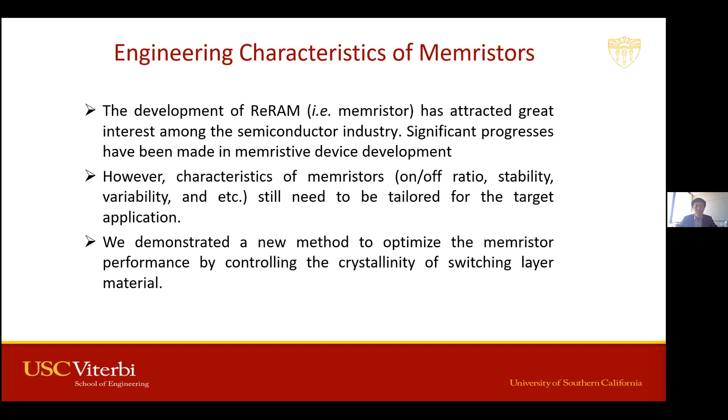And recently, we found another new way, a new knob we can turn to tune the characteristics of memristor. This is actually through controlling the crystallinity of the switching layer materials.

So this is the specific memristor structure we are using right now. We have a top electrode and bottom electrode, both made of platinum. And the switching stack consists of a tantalum and aluminum oxide layer. The aluminum oxide is deposited using atomic layer deposition.

And the fabrication process is actually fairly straightforward: just put one electrode, then put the switching stack, and put another electrode. And the one thing is, when we deposit this aluminum oxide layer using atomic layer deposition at different temperatures, the aluminum oxide layer will have a different crystallinity.

And here it shows XRD data of the aluminum oxide layer deposited at different temperatures. You can see when we deposit this aluminum oxide layer at 80 degrees C and 120 degrees C, it is amorphous, and when deposited at 160 degrees C and 200 degrees C, it is polycrystalline. And here we summarize the property.

One sample is deposited at 160 degrees C, and the average grain size is about 150 nanometers. Another one is deposited at 200 degrees C, and the grain size is about 207 nanometers.

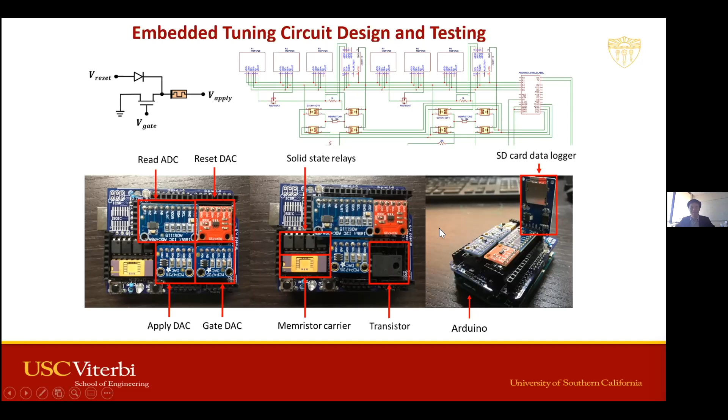But for the real application, we don't need this. So this is a circuit diagram, and this is the setup.

Okay, so now we have this nice device, and with it we can program different conduction states. Now let's go talk about the real fun part: the hardware implementation of the simplest cerebellum for the simplest robot.

In order to do this, we need two functionalities: one is sensor fusion, and the other is the control algorithm. For sensor fusion, we implemented an analog Kalman filter, and for control, we implemented a very simple PID control. Now let's look at those.

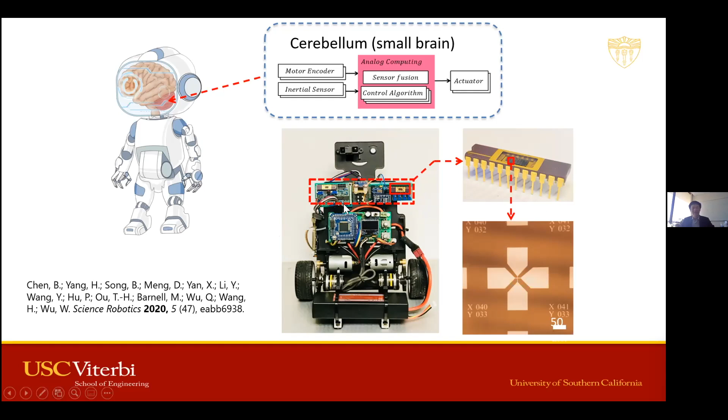Here is a picture of the car with everything installed. You can see two boards, and on each board we have a chip carrier with memristor chips. On the right-hand side is the sensor fusion part, and on the left-hand side is the control algorithm part. Now let's look at this in more detail -- this self-standing car is basically an inverted pendulum.

This is the system diagram. What we have is a memristor Kalman filter, used to synthesize the signal from a gyroscope and accelerometer.

After that, the result from the Kalman filter is fed into a PD controller. Basically, the Kalman filter tells you the state, or what angle the car is at now. Then it tells the PD controller, and the PD controller controls the rotation of the motor.

More precisely, it sends a signal to the motor controller, and the motor turns to keep balance. This part is all in the analog domain -- the Kalman filter and PD controller are analog, but the motor control module is digital. It's a digital motor, which is why we call it a hybrid computing platform.

Now let's look at this. Here, the sensor fusion we are implementing is a Kalman filter, which is probably one of the most widely used sensor fusion algorithms.

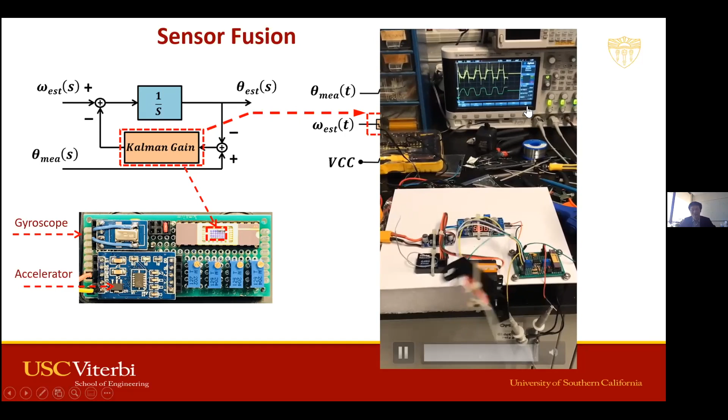Okay, in order to achieve this, we have to have a proper Kalman gain. Proper Kalman gain means you need to put in the proper conductance of your memristor. If you don't have the proper conductance, your Kalman filter can either undershoot or overshoot.

When we first showed this result, someone asked us: why do you have to have a memristor here? In this circuit, you could just replace the memristor with a resistor - calculate what your Kalman gain should be and put in a proper resistor. Why bother with a memristor? That's a very great question. It turns out the Kalman gain is determined by the noise level of your prediction and your measurement. The noise level of your device is actually different from each other, even for exactly the same model. For example, we bought four identical gyroscopes, exactly the same model.

When we put those 4 different gyroscopes in our system, you can see for gyroscope number 2, the Kalman gain is perfect. We're using the exact same Kalman gain and the exact same conductance value of our memristor in the circuit. But for the other 3 gyroscopes, obviously the Kalman gain is not optimal.

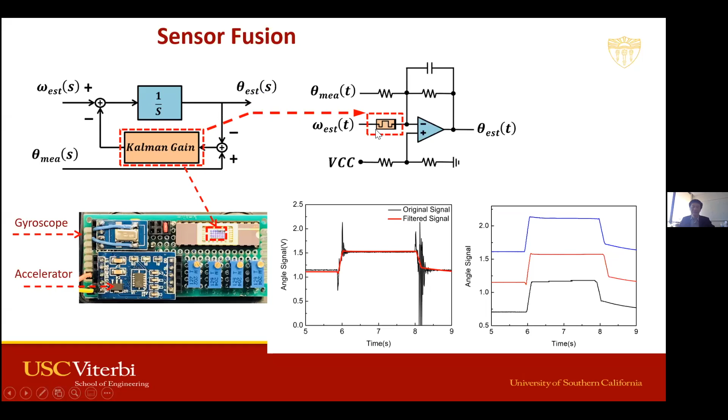Not only this, the noise level of the device also depends on temperature. For example, at 29 degrees C, our system has the perfect Kalman gain. But when it's too cold or too warm, we need to change the Kalman gain. Because of this, you want a device in your circuit with a conductance value that is tunable, making it much easier to implement this system.

And then now we have the sensor fusion part. Now let's talk about the control part. Again, we implemented the simplest possible control, a PD control, actually even a simplified PD control.

For the inverted pendulum, we have a damping in the control. You can think of it like a spring: the spring has damping. If the damping is too low, you pull your spring and release it, and it will vibrate for a long time. But if the damping is too high, you pull the spring, release it, and it takes a long time for the spring to slowly go back to the equilibrium state.

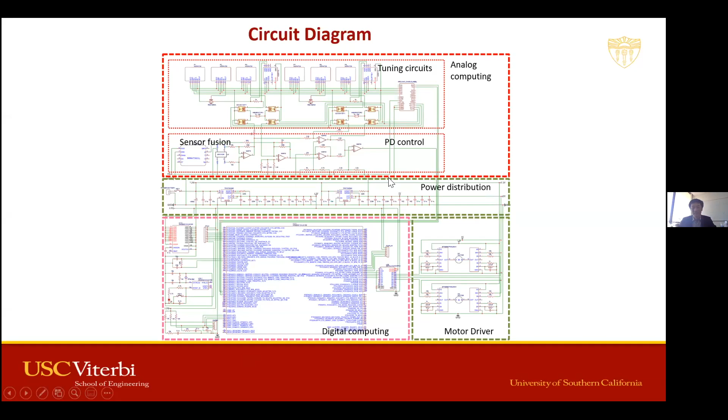Those two memristors can either be connected to the sensor fusion part or the PD control part. This is the circuit we use to tune the memristor conductance, a tuning circuit controlled by, essentially, analog parts, but here we have an Arduino to control it, and Arduino of course is digital. This is the part that actually comes with the self-standing car originally, including the power supply, the motor driver, and other controls of the car, for example the small display screen on the car, things like this. And yeah, those are the memristors.

We would also like to compare with some other previous work. To put a long story short, for this self-standing car, on the gyroscope, it actually comes with a digital Kalman filter. But this digital Kalman filter is relatively slow, taking about a few milliseconds. For this one, it costs almost 9.5 milliseconds, which is fairly slow.

Another way to implement this is using a faster processor on the car to do the digital Kalman filter. But the latency here, for the Kalman filter itself, the calculation is very simple, the math is very simple. The most latency actually is on

the communication bus. You have to send, of course, the device first gets an analog signal, then the ADC converts from analog to digital, then the data has to be sent from the communication bus to the processor, then the processor does some calculation, and then sends it to the PD control. So that gives about 3 millisecond latency.

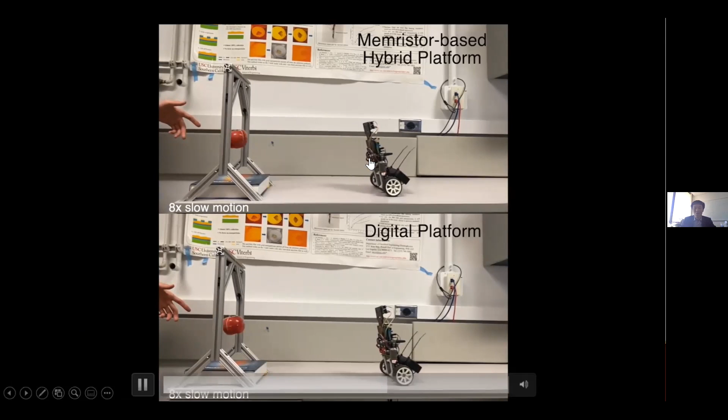Did you see the top one go back to balance much faster than the bottom one? The bottom one shakes for quite a while. Let's have a look again.

You see the bottom one shakes for a while. I want to look at the wheel this time. You can see, if you pay attention, for the top car, after impact of the apple, the wheel starts to spin immediately. For the bottom one, if you look carefully, there's a small delay before the wheel starts to spin.

That's why the bottom one shakes so much, and that's basically why the top one goes back to balance so fast. The latency is much smaller, and that's why it's much more stable.

So basically today I talked about two things. One is a way to engineer the characteristics of a memristor through controlled crystallinity of the switching material. The second part, I showed you the simplest cerebellum for the simplest robot, implemented using memristor-based analog computing plus some digital part, and it shows much nicer performance.

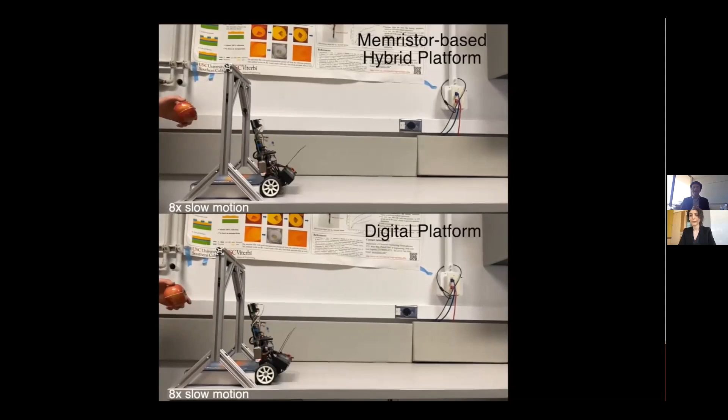Actually, if you think about it intuitively, it's reasonable, right? When it's amorphous, the switching is more homogeneous, the material is more homogeneous. With polycrystalline, you have a lot of grain boundaries, and the filaments or conduction channel can form along the boundaries. When it forms along different grain boundaries, it can be less repeatable, and so that is why.

Also, I think for the curve I showed, the question probably asked why the 160-degree one works better than 200. First, 120 works better than 160, and for that specific curve, the 160 looked better than 200.

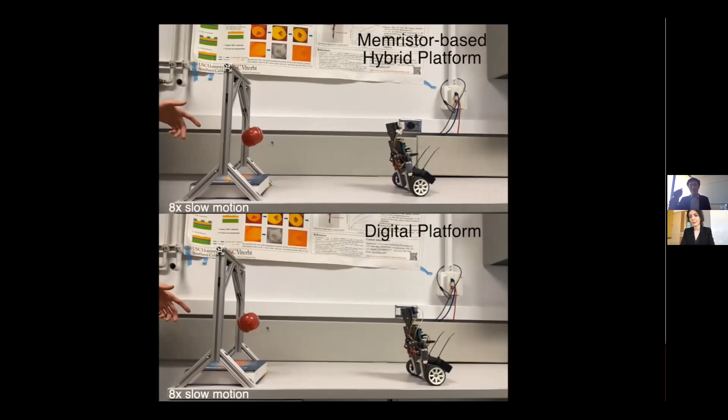Actually, that's because for that one, I showed about 1,000 switching cycles for this specific device. After, I don't remember, a few hundred cycles, the device got stuck at either on or stuck at off. I don't remember exactly, but after getting stuck, the switching stopped.

For this experiment, we just used a pulse train: switch on, off, on, measure it, off, measure it, on, measure it, off, measure it, and record it. In a real application, of course, if your device gets stuck in the on state, you can also do a forming process to try to save the device, and then the device can continue to work.

So just to follow up on that, are there features of your memristor device that are not optimal for the particular applications? Are there features that you would hope to have in your device?

Yes, it's a great question. First, the reason we pick this memristor—if you read the papers, there are many different material combinations to make memristors—is because this one gives us the most linear IV curve. In the circuit, it doesn't matter whether it's common gain or the PD control, the parameters are all implemented by the conductance value of the memristor, and we want the memristor to be as linear as possible, so we use this one. But if you look carefully, the biggest thing we want to improve is that for this memristor the resistance is relatively low.

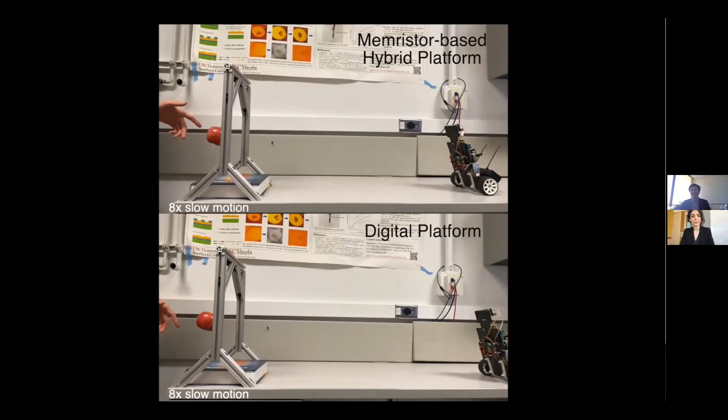The next question is asking, is there a chance of ionic absorption that may impact the longer term performance of the memristor device?

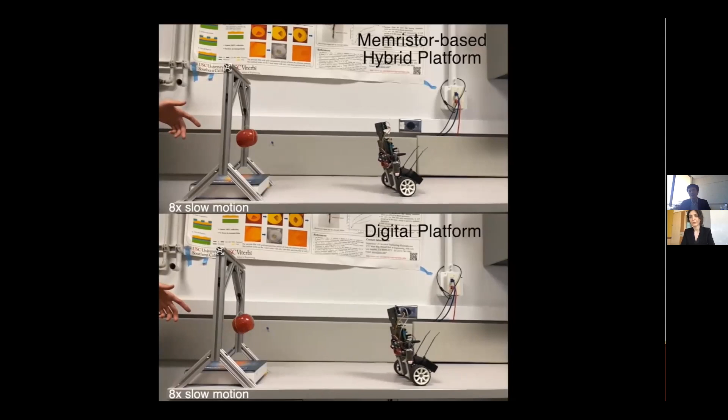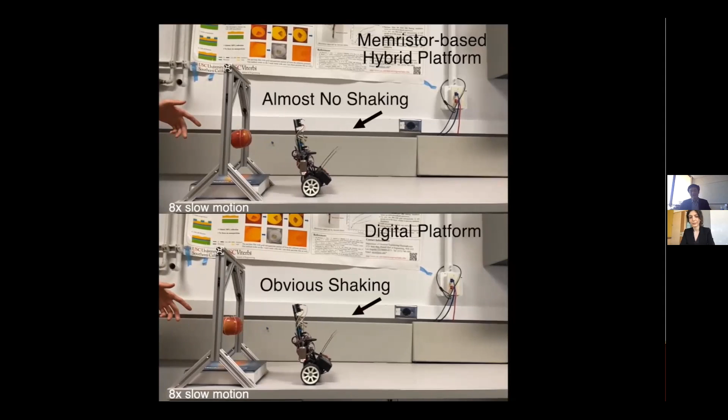Actually, that's a great point. For this specific device we don't know, because we only measured it up to 8,000 times. Our measurement setup uses a switch matrix, and for every point it actually takes a very long time to measure. It's very possible this could be one of the failure reasons for the memristor.

But for this specific application I'm showing here, we're not really using this as a memory device—we're using it to tune the common gain and also the damping factor, and they don't really need to be tuned too often. So 8,000 times is already more than enough for what we ever need. We never really studied this further.

The next question is asking, curious about the 8-bit ADC, whether this was a bottleneck in terms of performance. No, this is not the bottleneck.

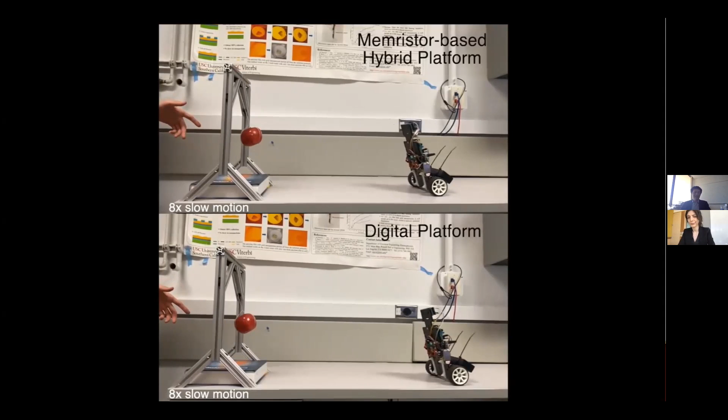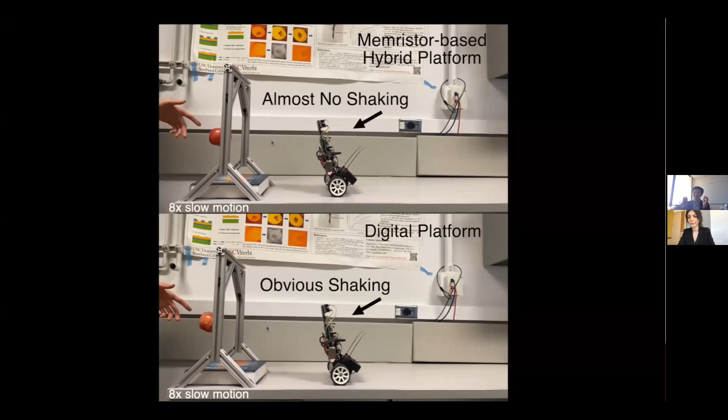For this memristor, we can have a 7-bit equivalent, 157 different conductance values—so it's equivalent of 7 bits, not even 8 bits. Actually, we don't even need to have so many bits. For a system like this, the latency is actually much more important than the accuracy. Just think about ourselves: you really don't care whether you are leaning to the left by 1 degree or 1.1 degrees, as long as you know you're leaning to the left and need to push right.

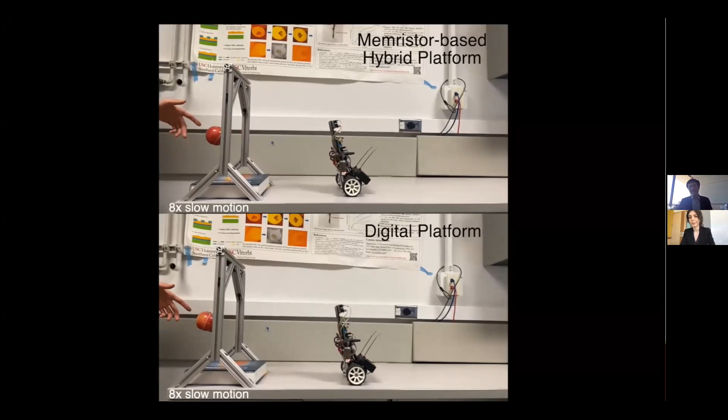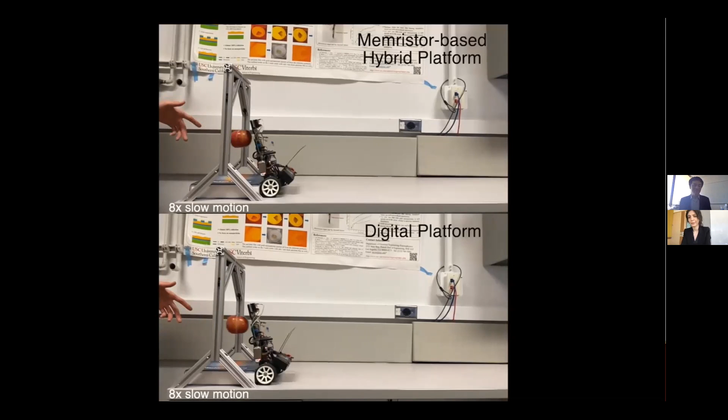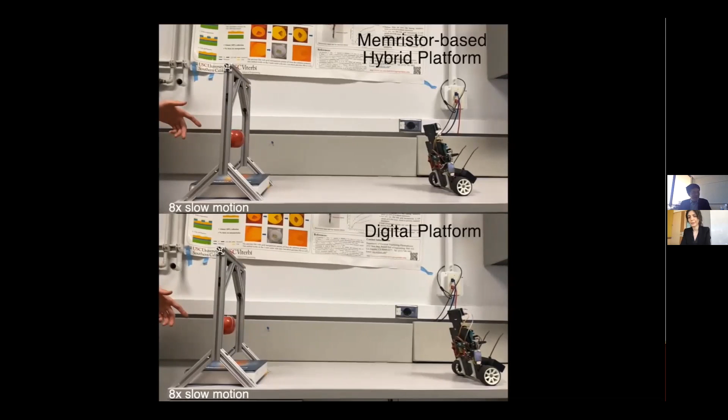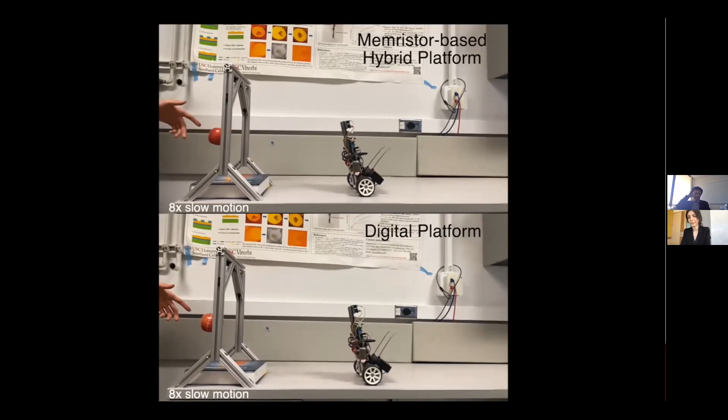Since we're talking about this, this is actually a fun project for us. Some of you may have read novels about martial arts, where people say, 'this fighter is so stable,' and ask why—because he did this and this exercise. I realized what the exercise means: basically they train their lower-level nerves to have a response to impact, so they don't need to use their brain to think about it. Their response latency is much shorter, which is why they stand much more stable than other people.